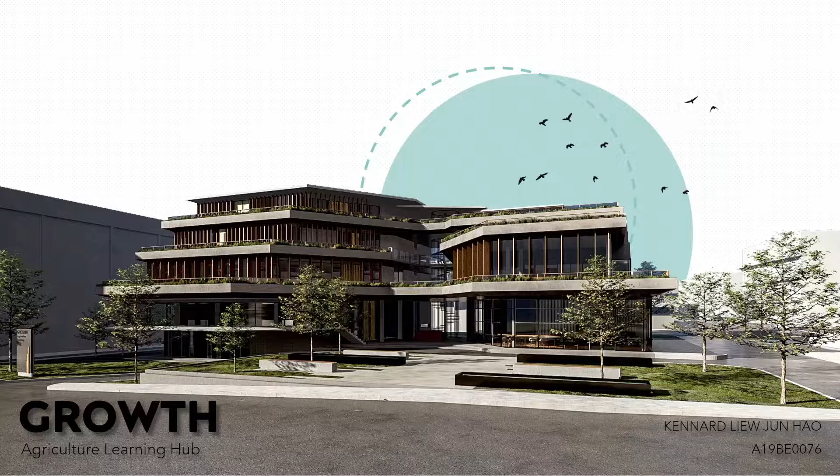So I'm now proposing my design, the Growth Agriculture Learning Hub, a breeding ground for future modern farmers, the place where the seeds of modern agriculture grow.

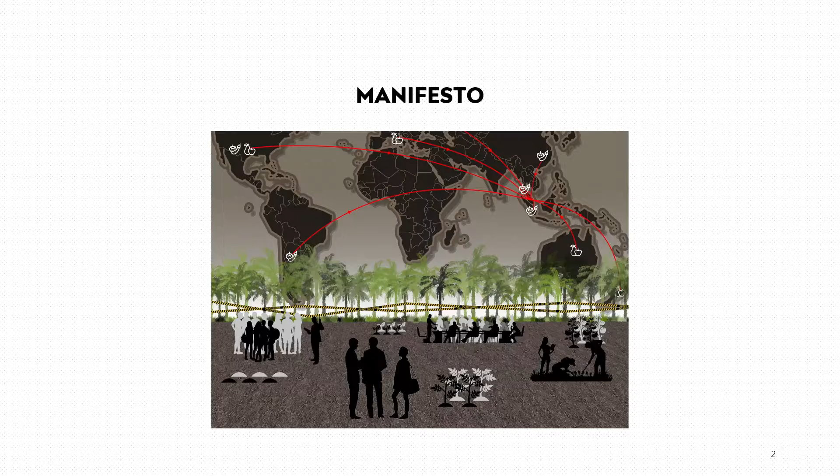The manifesto shown here is a visualization of the issues and design objectives, which will be presented later, to raise awareness among the younger generation to stop putting too much focus on oil palm tree plantations.

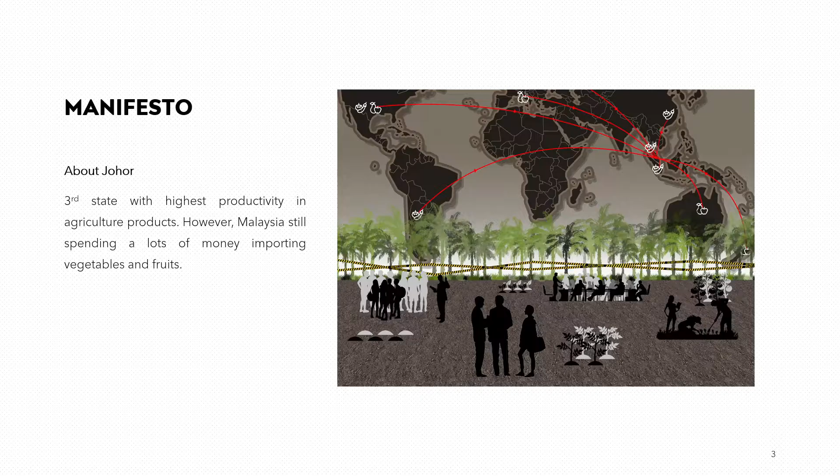Looking at a larger scale, an article suggested that Johor is the third state with the highest productivity in agriculture products. However, the fact that Malaysia still relies a lot on imported vegetables cannot be denied. The reason behind this situation is the focus of local people on high-earning, capital-intensive activities such as oil palm tree plantation, livestock, manufacturing, and the servicing sector.

As we look into the context of Kluang town based on the Kluang 2030 plan, most of the land is currently used for oil palm tree plantations.

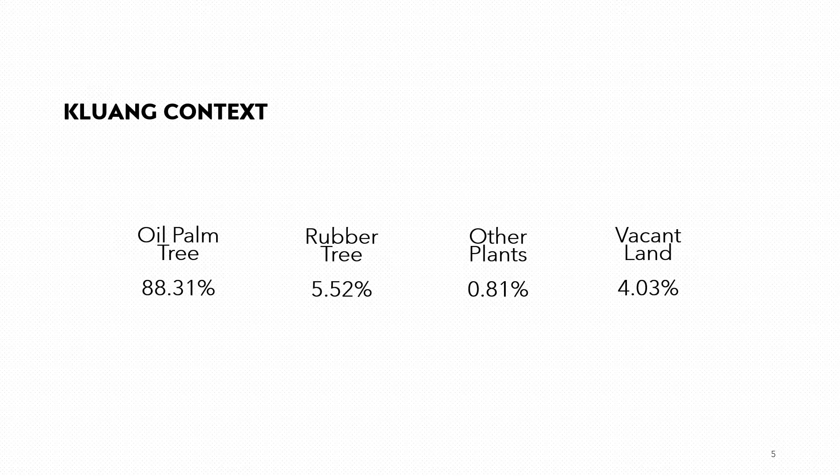This leads to the design issue where the involvement of local people in other plantation sectors is rather low, and due to this reason, the locations of farms within Kluang are scattered around the outskirts of the town, making interactions and integration between farmers more difficult.

So I came up with this design intention where Kluang acts as a center of agriculture, responsible for the development of technologies and knowledge in the food industry in order to promote modern agriculture, through the introduction of modern agriculture in a more interactive way such as virtual reality exhibitions, by providing a platform for local people and the younger generation to communicate and exchange ideas, as well as providing theoretical and technical support through learning activities and R&D activities.

The design process starts with the site study. In terms of climate, the prevailing wind from the northwest direction can be utilized to cool down the building.

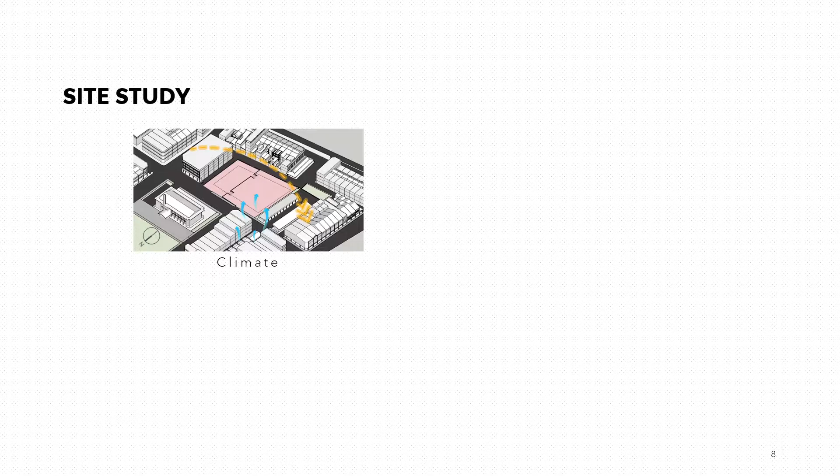As for the views, the best view will be the park in front of the site, followed by the movement of vehicles and KTM in the west direction for cityscape views.

In terms of circulation, the site is located at a strategic place where it can be accessed easily and be easily seen by people from two main roads, Jalan Mersing and Jalan Sultan.

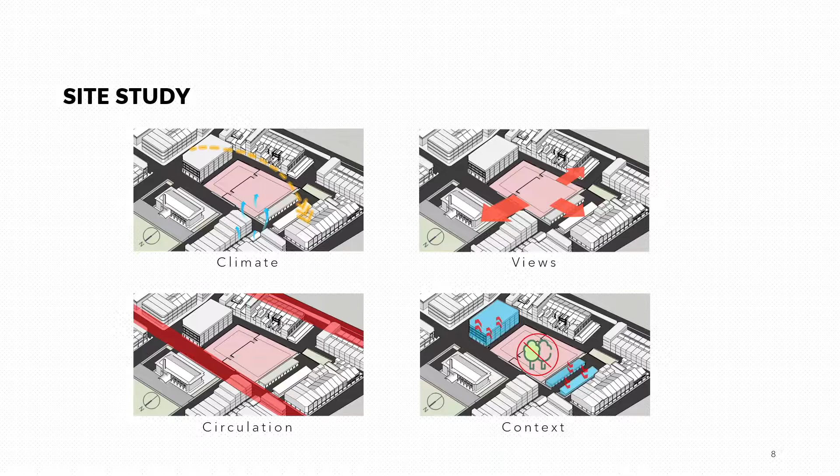However, the site is not that pleasant due to a lack of greenery, and the proportions of buildings are descending from east to west, creating a flow.

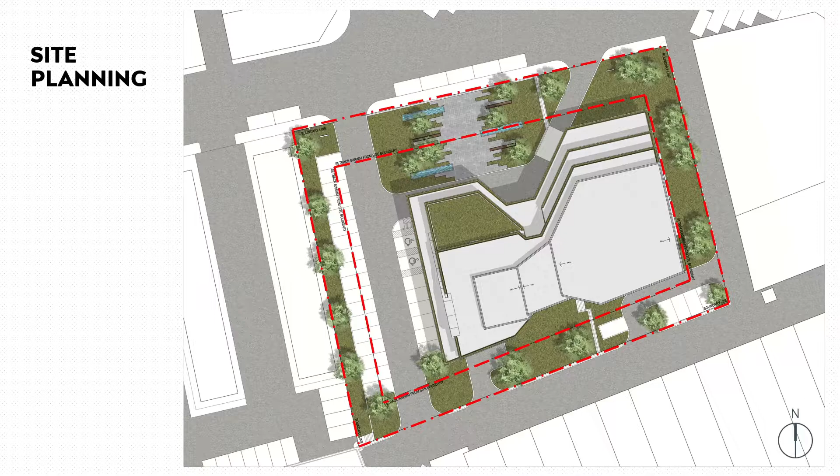So the building is proposed to be built near the taller blocks of buildings, in order to prevent interruption of the proportion around the site, leaving an open space at the west area for parking lots, as well as egress and ingress, connecting the two main roads and connecting to the park visually. The north area will be utilized for a plaza, increasing pedestrian interaction.

The concept of the design is growing, a process where mutual improvement and cooperation is important to boost the development of plantation sectors, by bringing everyone together to form a sense of community, promoting interactions between individuals.

So I take inspiration from the structure of the plant, where plants normally have a larger lower part and become smaller at the top. I take this element, creating a cascading effect as the hierarchy of the form, descending from bottom to top, which can guide the view of visitors to enhance the dynamic visual of growing from the ground.

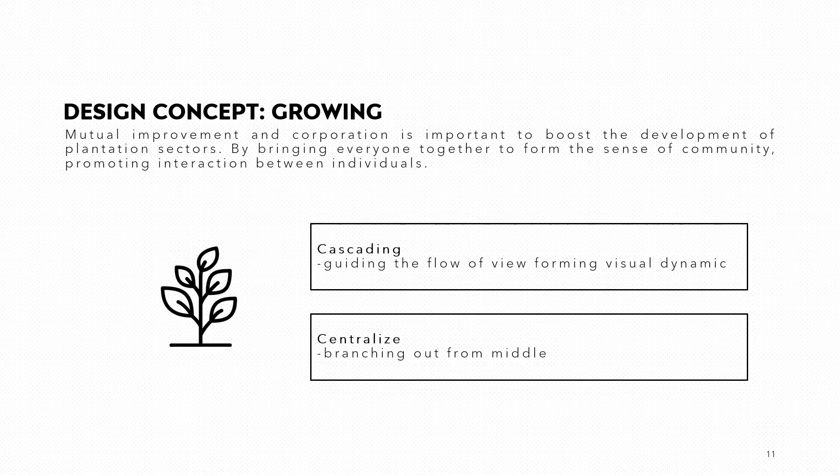Centralized is another element I apply into the design, as the leaves branching out from the stem, the main vertical circulation of the design will be located in the middle, reaching out to the spaces around it.

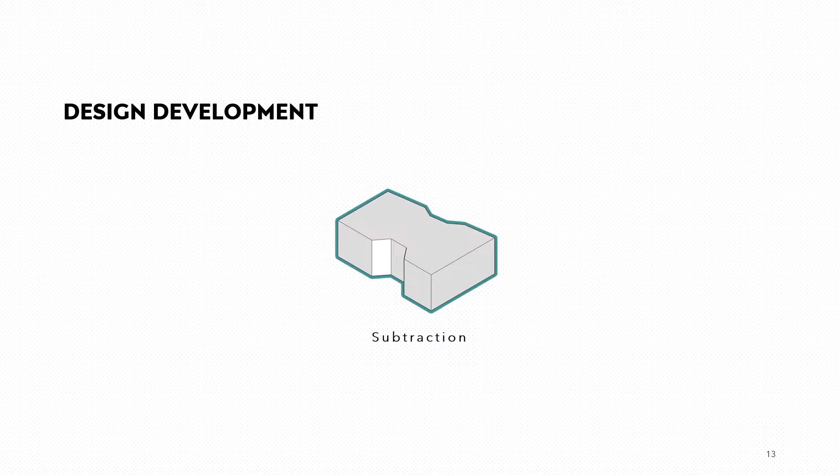So the form started from the extrusion of the shape of the site, subtracting the form and inclusive area, inducing the sense of welcoming. The form is then proportionate in such a way that the left wing is larger, responding to the taller building at its direction,

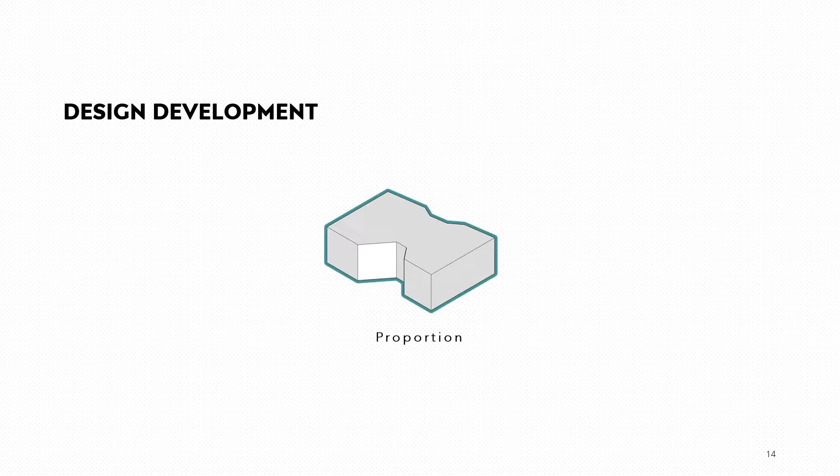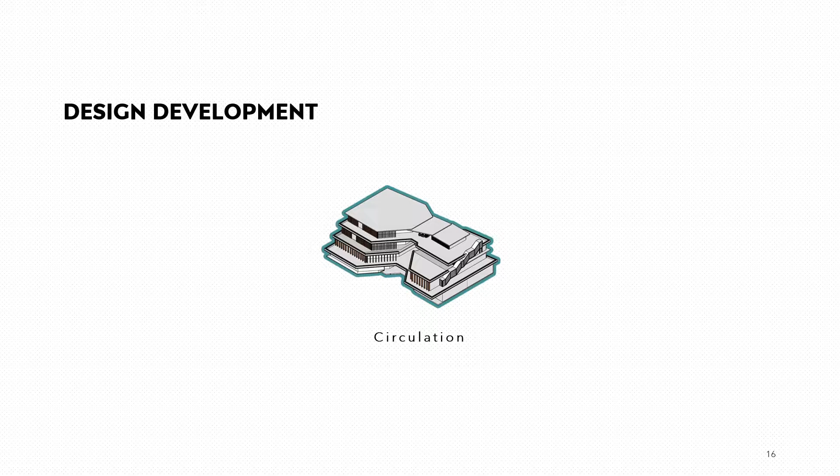as well as helps in catching the prevailing wind from the northwest direction. Hierarchy is then applied by pushing the forms inwards to create a cascading form. Lastly, adding circulation area and outdoor spaces with green balcony for multi-floor visual interactions.

The ground floor consists of a cafe and a multi-purpose hall which is 1.2 meters below the ground with double volume space, where talks and annual expos can be carried out in the hall to expose the public to modern agriculture,

while the servicing area is located at the same level as the multipurpose hall, right behind it, since that area is least accessed by the public. The loading and unloading area is located right behind the kitchen of the cafe together with the refuse chamber to ease the access of the staff, as well as a servicing lift that transfers goods to the upper floor through another door.

The fire staircase, together with the lifts, forms one of the cores in this building, while the other core will be the fire staircase at the southeast corner.

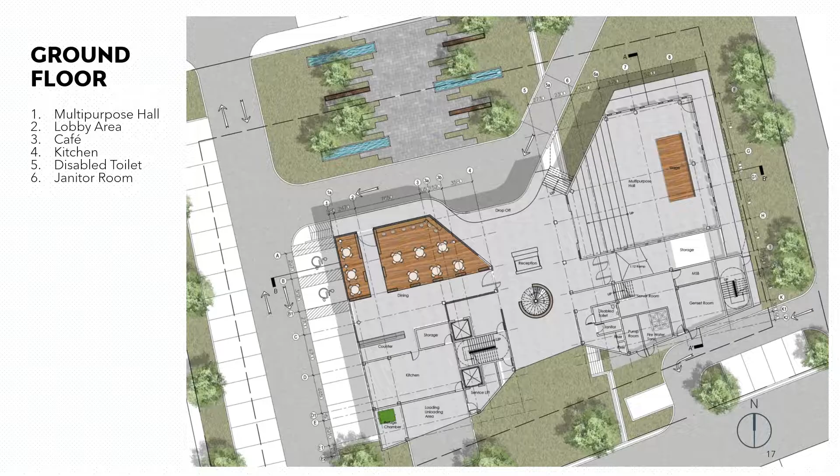The mezzanine floor is a ramped-up VR exhibition corridor, creating the ascending experience as the screen introduces plantation techniques from the past to the future, while the toilet is located behind it and is 1.8 meters from the ground, leaving a 3-meter headroom space for the servicing area.

Coming to the first floor from the central staircase and lift will be the learning floor, where formal learning will be held in lecture rooms and informal learning takes place in the library lounge where visitors gather and exchange ideas, while hands-on practical learning will be carried out in the workshop.

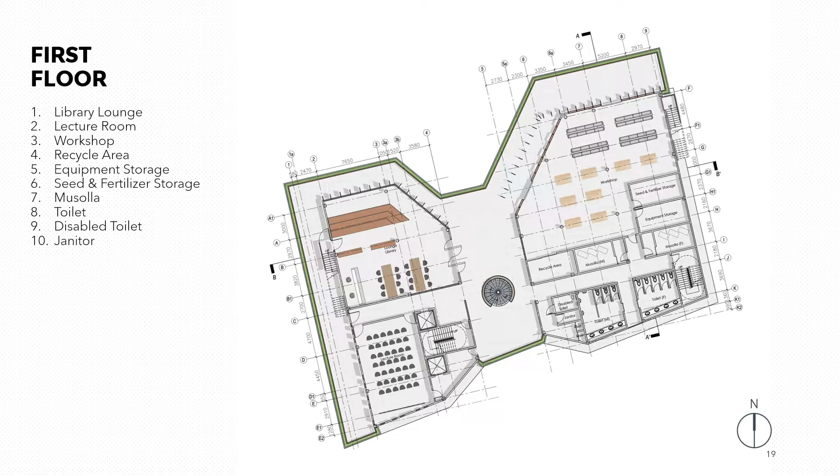An alternative door was located right behind the space of the workshop to ease the fire escape. The same goes for the upper floor at the same area.

The second floor will be more private, with discussion rooms and silent rooms for more intimate learning, providing a roof garden for visitors to unwind their mind with views of the park in front of the site. An administration area will be located at the east wing.

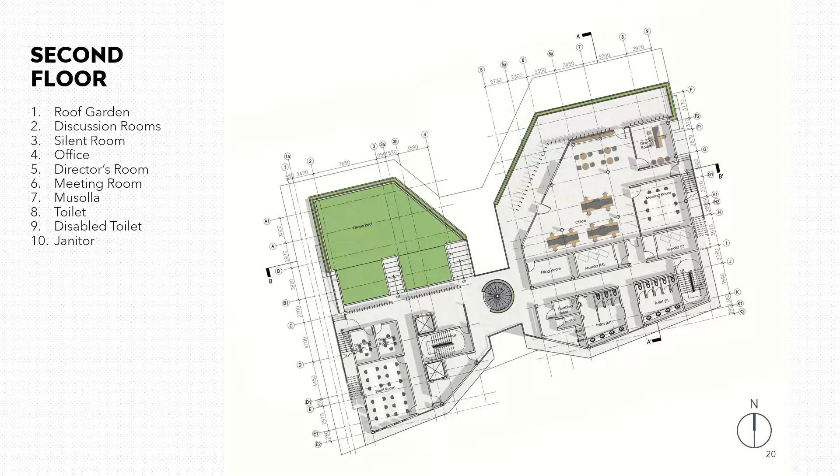Lastly, the nursery or laboratory is located at the uppermost floor for the R&D activities of plantations and processing techniques.

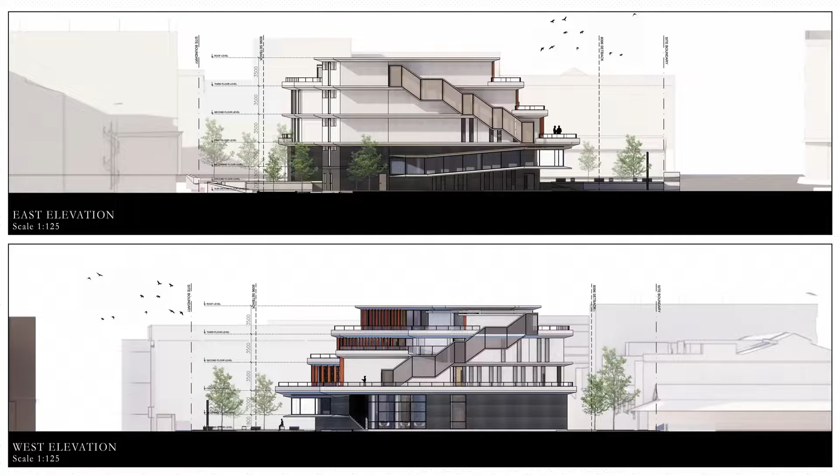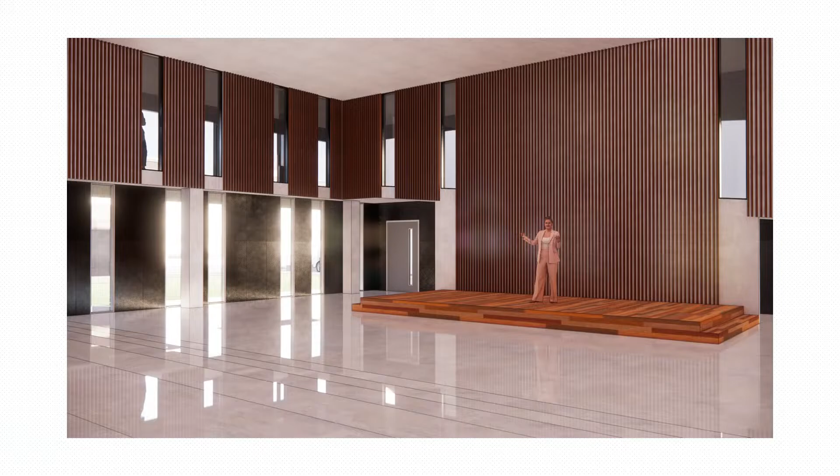And here are some of the interior perspectives showing the multi-purpose hall with a small opening on top looking out from the exhibition corridor to give a sense of anticipation.